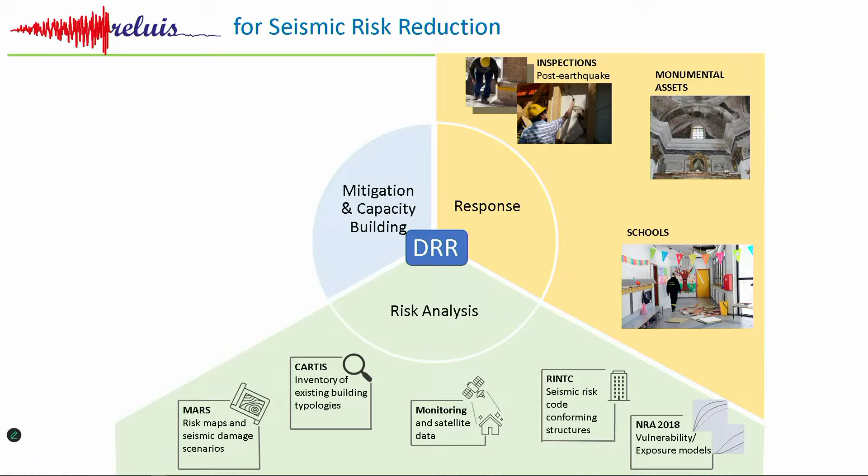Regarding seismic risk reduction, with ReLuis we work on disaster risk reduction across three components: response, especially after events; risk analysis, which I will mention later with several projects; and mitigation and capacity building, which involves a lot of activities devoted to raising awareness among people, providing design guidelines, and informing practitioners.

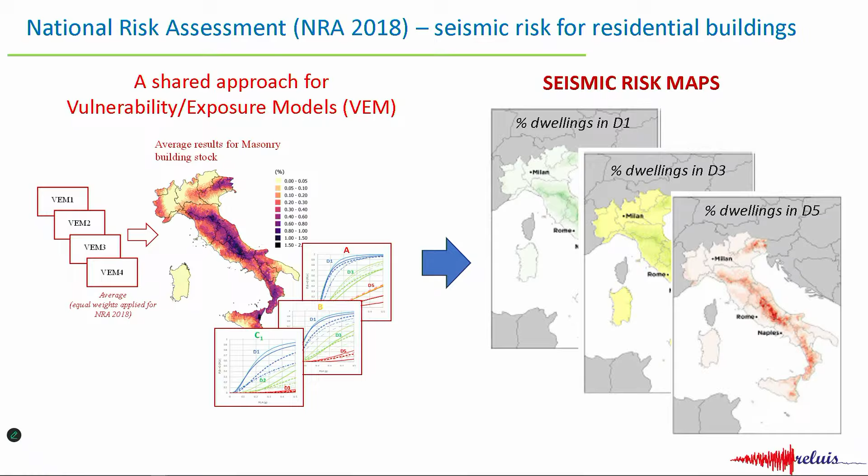So I think resilience is something that allows us to look at what we already do since many years, but putting all this together and having the perspective of resilience. So for sure the seismic risk maps are important, and in order to build them we need some ingredients.

That's why, for example, in Italy, I was very much involved, we performed a lot of work on the inventory. We made interview-based protocols and surveys about the typologies of buildings in different municipalities. As of now, we have covered more than 500 municipalities surveyed. This means we have an idea about the structural configuration of buildings, residential buildings, school buildings, and so forth.

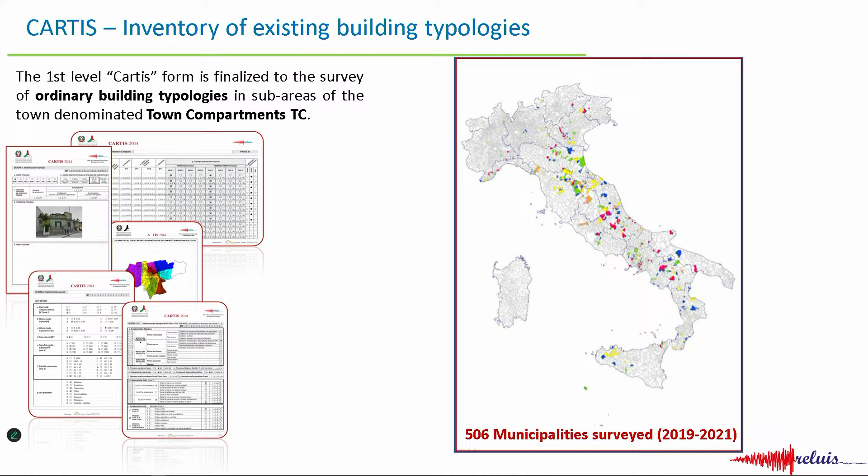We know this is very important because in this way we can really make a reliable assessment of risk, not only residential but also schools. I just need to go fast - you see more than 1,000 schools, so we also know very important information about school buildings.

On mitigation, I wanted to share with you interesting outcomes of a project about the definition of criteria and solutions for the design of integrated and sustainable interventions in Italy, but I think all over the world. We have a strong pressure to reduce the seismic risk, but at the same time to reduce the energy dispersion of buildings. So the effort we are performing is to push the government, but also the industrial world and practitioners, to look at this problem together.

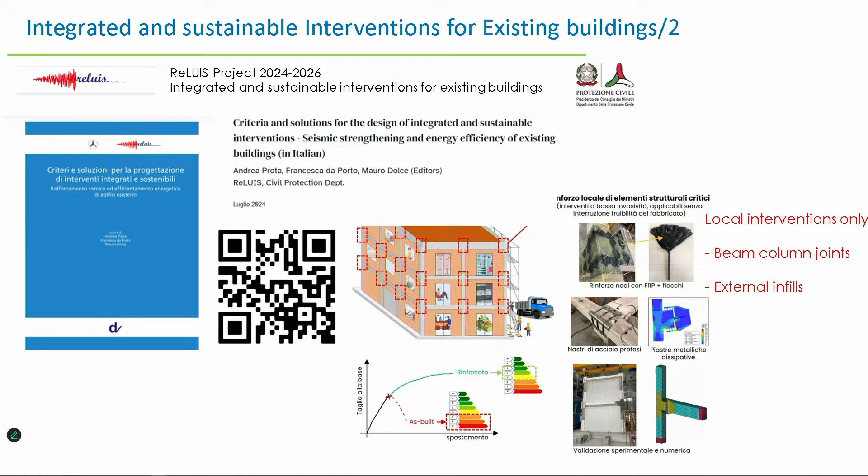So once you open up some works on a building, you take care of both the seismic part and the energy part. In the book, which you can access by the QR code, there are also examples which are important for us, and civil protection wants us to develop practical examples because all this should reach the practitioners, the engineers, the architects, the real world. That's why research becomes a support.

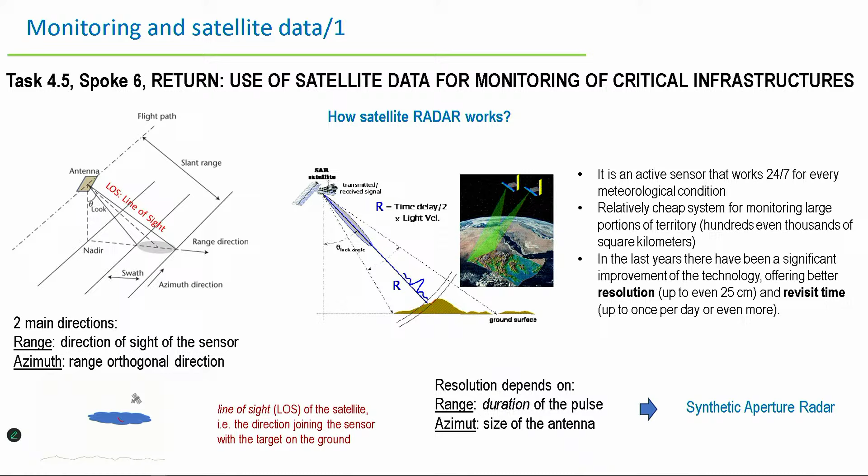I wanted to mention also some interesting activities we are doing on the use of satellite data for integrated monitoring of buildings and bridges. I can just go very fast on this, but this is a very important potential - again, to have a survey and to understand and assess the eventual displacement of bridges or buildings and establish priorities for interventions. So on this I'll go fast, and let's move on to the second part because time is short.

Resilience - we know this is a tool, I think, that can allow us to move from strategies to solutions and then to action. To answer, of course this is my point of view, I think we need to improve, on one side, the support of government, because science should be translated into policies in order to have real disaster risk governance. We need governments to assure financial support, and we need to involve and support the stakeholders, which are practitioners, entities like local authorities, but also civil society.

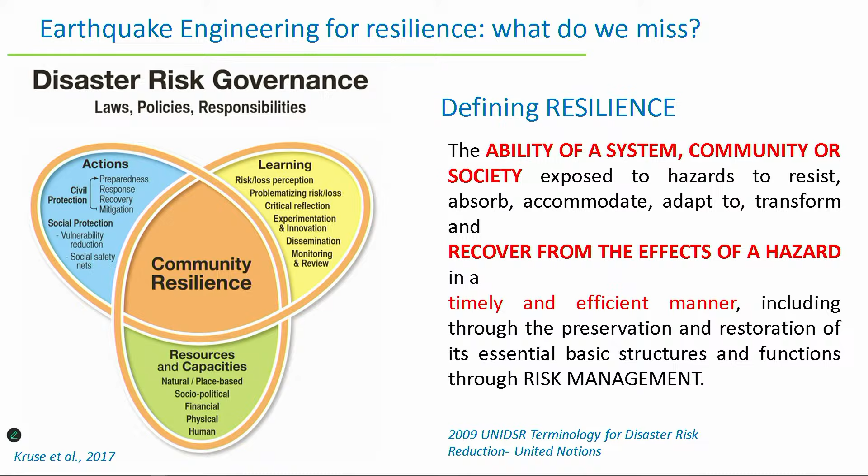In these slides you find one way of defining resilience - I'll just leave it like that. That's a definition in terms of terminology from the Disaster Risk Reduction framework of the United Nations. In any way, resilience aims at recovering from the effect of a hazard in a timely and efficient manner. There is also a proposal of definition from MCEER, the Multidisciplinary Center for Earthquake Engineering Research, and you see this circle that allows us to stress that resilience has different dimensions, and that we need to put together risk assessment and resilience assessment in a holistic approach, and understand how to measure resilience for different domains. This is a typical slide about resilience.

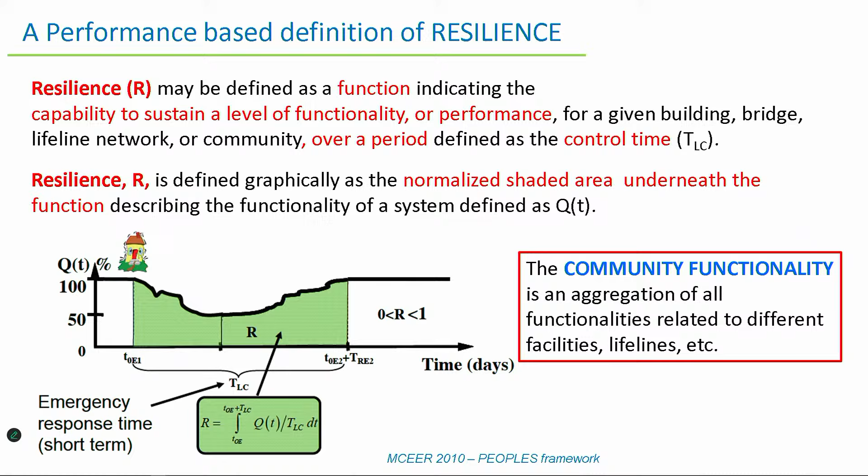I just left this for all of you in the room or online, but I'll say on this slide that we look at the community functionality, which is an aggregation of different functionalities related to facilities, lifelines, and other components of the built environment and the social components of our society.

Something we are doing, just to share with you in this flowchart, when we try to measure disaster resilience based on functionality: we have an initial functionality, then the functionality of the social system is affected by the hazard, which causes a drop after the shock, and then we need to evaluate the recovery pattern over time.

For example, we are working a lot on building portfolio recovery under earthquake, because we know there are defined impeding factors — factors that can cause delay, such as lack of money, lack of workers, lack of good policy. So the functionality curve over time can have a delay and then a trend which depends on this, and we are creating different scenarios around it.

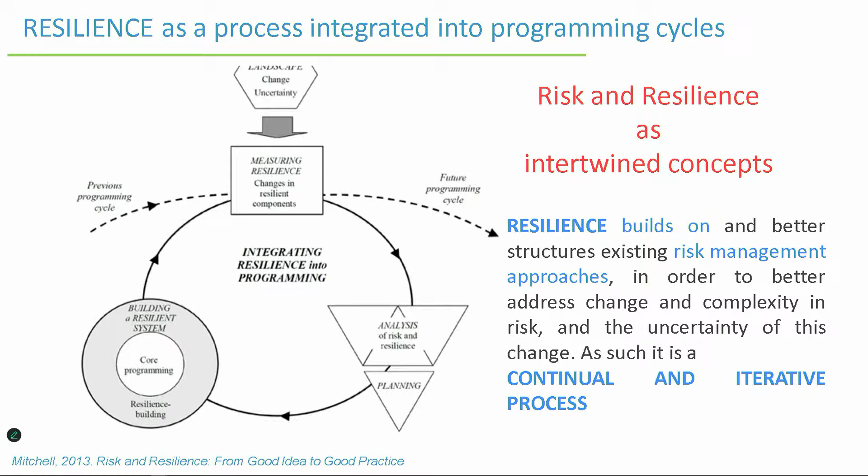Another concept, I hope we all agree on: risk and resilience should be looked at as a progressive update. We start by measuring resilience, but as we perform interventions or something outside changes, resilience changes, and the risk should be updated too. Just a few more minutes and I'm done.

To answer the last question, and to share a strong belief we have developed in Italy: for our science to become useful to the community and to citizens, we really need to link with people, with the community. So we need stakeholder involvement at different levels — local government authorities, policy makers, community groups, and citizens. We are working with colleagues in social science and economics to develop participative approaches for more effective planning and useful results.

I'll show some examples. I recall this interesting approach from UNDRR in 2017, where they proposed a disaster resilience scorecard for cities with 10 essentials — of course, very briefly. I'll develop one example, a way to address and apply the Sendai Framework for Disaster Risk Reduction. Let's pick the second one: identify, understand, and use current and future risk scenarios.

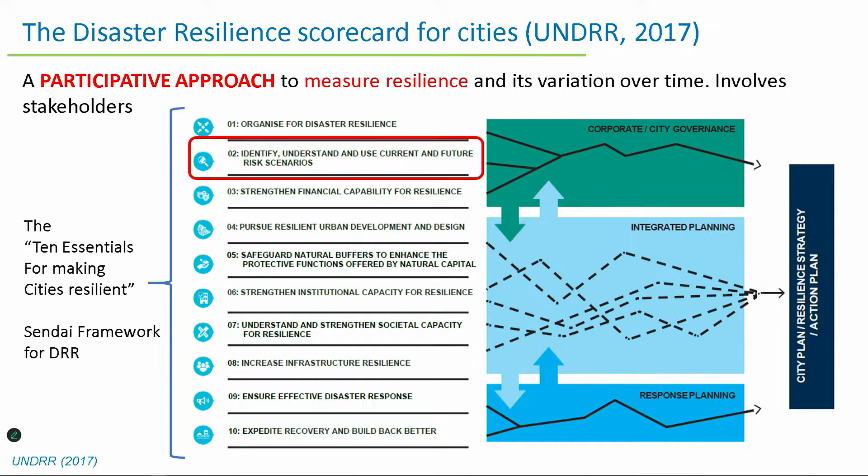In this approach there are two different levels. One is applicable in a short time, with questions where different stakeholders can provide a response on a range from 0 to 3 — for example, related to cascading impact. It's a way of interacting with stakeholders. Then there's another, more detailed level, taking 1 to 4 months, where the assessment is more careful and the outcome is more detailed.

Just to give you an example of what's going on in the world with this approach — in Italy we are developing two storylines which are very important. These are photographs taken at different universities. You see people sitting around the table with a collaborative approach.

We also invite stakeholders and representatives of associations to take this approach, starting with a brief story — you put a case on the table and categorize the impact, looking at population, public services, critical infrastructure, and natural environment. Then you look at the interdependence between these and the cascading impacts — you see all those post-its we put on the screen.

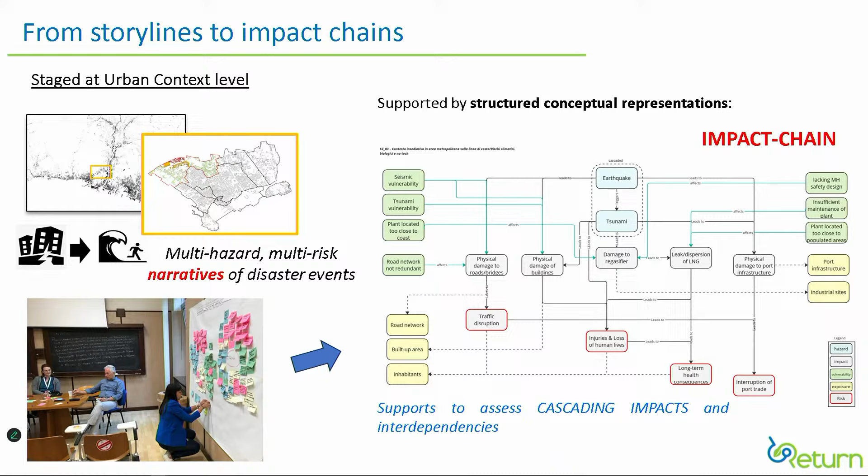I think I'm at 15 minutes, my last slide. Professor Ayala asked us very hard questions — of course I just gave my perspective, but I think earthquake engineering should improve dialogue with multiple stakeholders, and it's important to push toward more resilient communities, because this is a pathway to more inclusive community resilience.

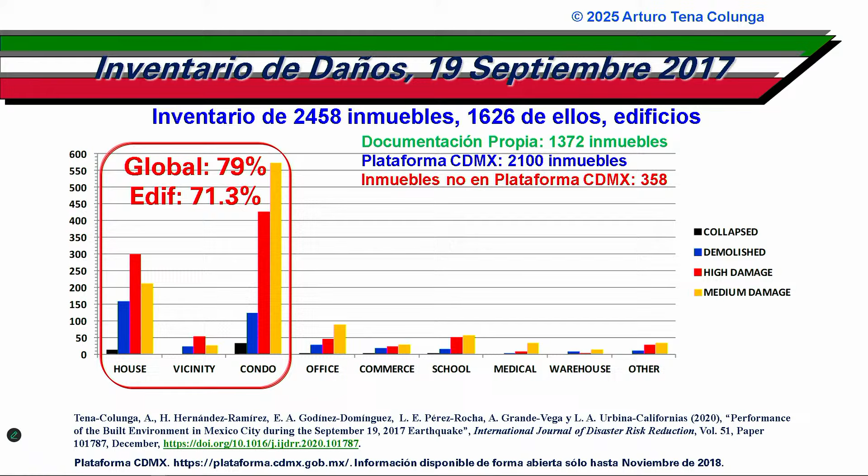We have close to 2,500 buildings that were seriously damaged in several parts. I didn't like the quantity, taking into account the size of the earthquake and whatever. I didn't like that most of the damaged structures were for housing, according to the statistics that we had.

And if we look at the codes, we have 18% done with collapse prevention, modern codes that should behave better given the demands in the places where they were, that is in the western part of the Lake Texcoco, where the ground motions weren't that intense compared to the design spectra. So basically, if we look at the 1976 code, okay, we could say that was surpassed by far. But if you look at 1987, 1995, and 2004, they should have been covered in that region.

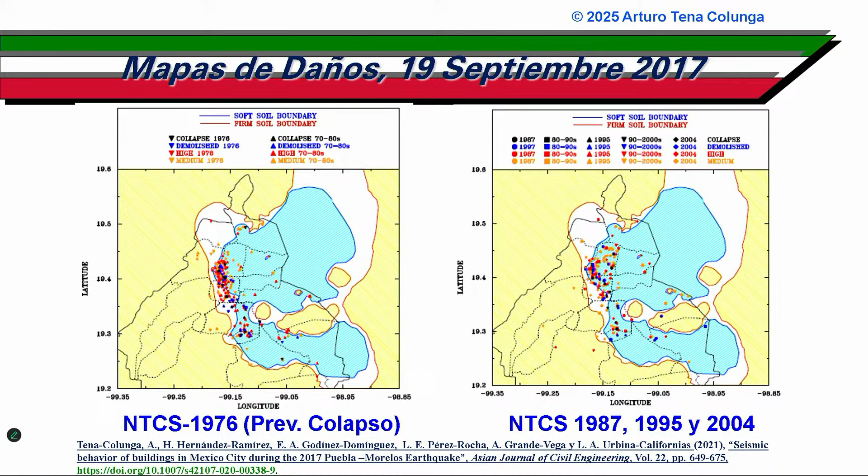Then an eternal problem with the structural irregularities. 90% of the damage was on structures with at least one structural irregularity. And it's something that we have to address through research, not through inventions like some are doing. Some people don't think we have to have a special way to design structures with low redundancy in one direction. They are very vulnerable, as we can see in the statistics.

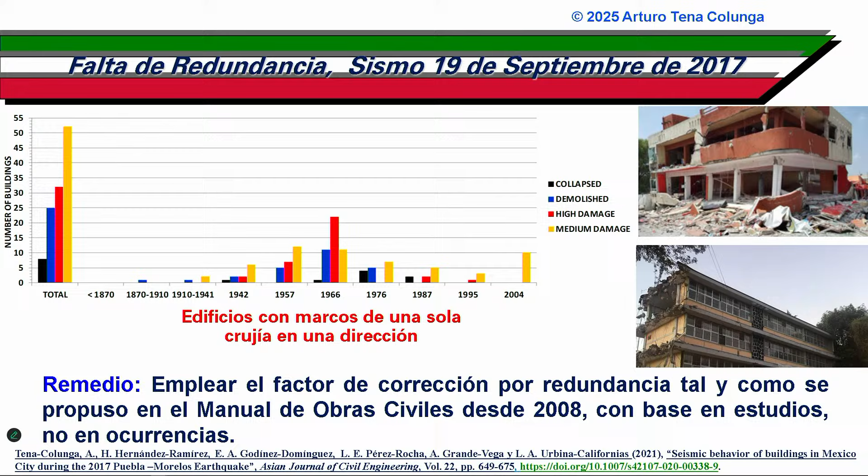We didn't decide to build a city when they made this historical decision, but we have this problem with the subsoils, and it's something we have to take into account, including when we are trying to promote seismic control technologies like base isolation. That is not a place where we should use base isolation, and some people are saying that they are resilient just because they put it there.

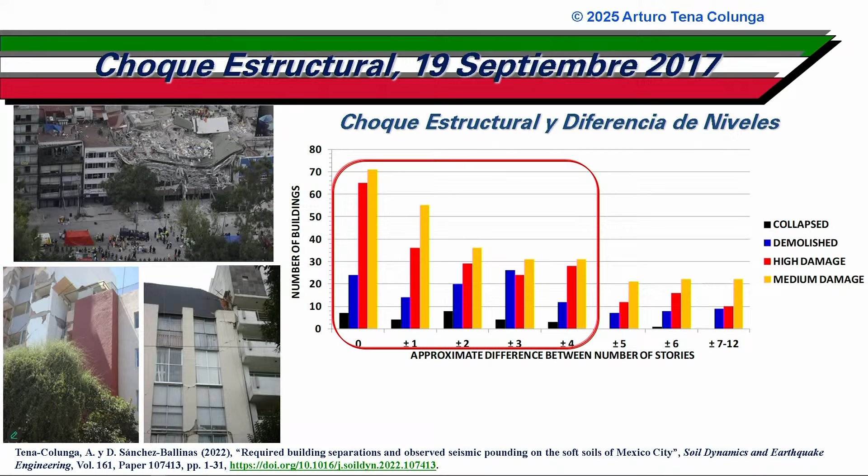And a perennial problem, structural pounding, that is magnified in these subsoils. We have to do something to provide better tools to the engineers to get the gaps right. This is the statistics of structural pounding, favored by non-synchronicity between the natural periods of the structures. As you can see, most of them were between 4-story buildings where they get this problem. We are trying to say that in the subsoils, we have to have at least a gap of 15 centimeters if we want to avoid the pounding being too strong, or have in the code an equation where the coupling, the synchronization, is taken into account to get a more realistic gap.

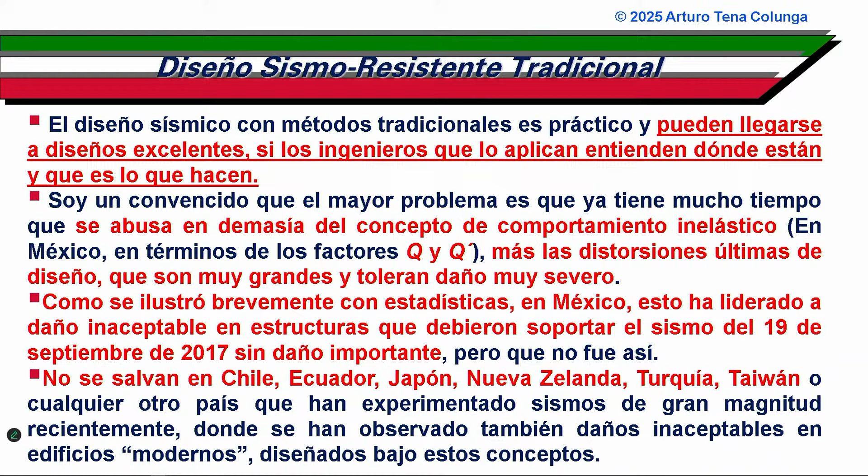And this is not only in Mexico, it's in any major earthquake. You see it in New Zealand, you see it in Taiwan. Soon we will see it in the States too. So basically, in Japan, there's also a problem with that. And basically, I don't think the problem is the methods. What happens when you reduce with ductility the design spectrum and you take the hysteretic behavior into account?

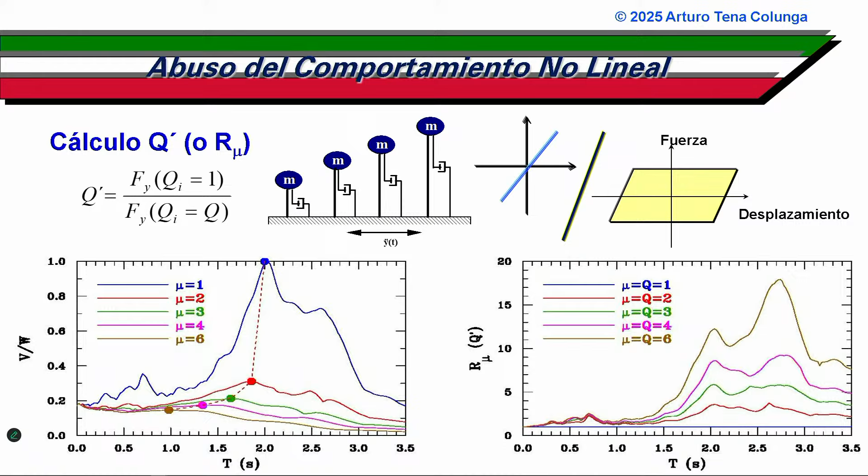In soft soils you have very large reduction factors, and that is very attractive for people. But if you reduce the strength, you're shifting the period of a weak structure, causing it to travel further and go into resonance. The problem is many people only understand elastic dynamics and resonance, that's the graph on the left. But in the nonlinear part, if you reduce with large forces, the resonance response shifts. So some people say, 'I have an elastic period of 1.3 seconds and I'm safe because my site period is 2.' No, it is not, because with a large reduction you get an amplified response there.

What we have to promote for resilience, in my opinion, is making engineers understand structural dynamics, nonlinear structural dynamics, so they don't design into what I call the rocky zone, the yellow one, where you get a lot of uncontrolled nonlinear deformation. We need to give engineers the tools to shift toward the zones of the spectra with reduced response, what I call the Mayweather zone, as an analogy to boxing.

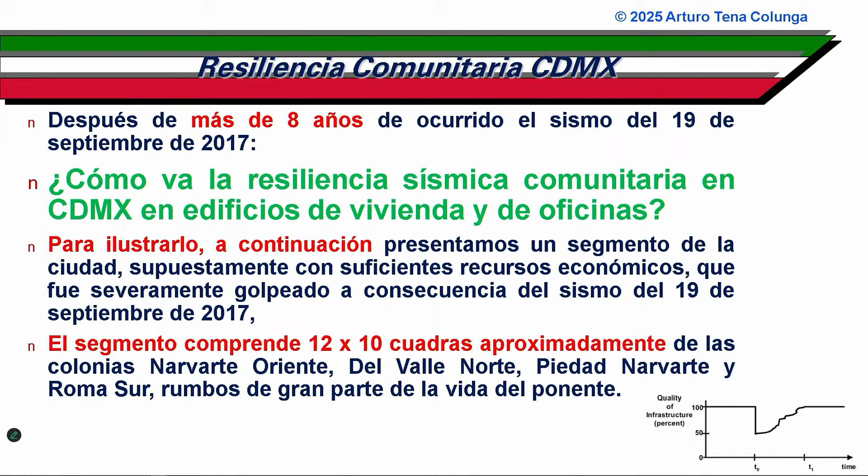So we're talking about these frameworks of resilience, which are of course complex, and we have to do these things. The problem is that sometimes this is based on guesses, not actual data. We have statistics of earthquakes, and everybody is a paparazzi of what's happening in a recent earthquake, but no one follows up.

Well, I follow up. This inventory of structures I've been following, it's like I could call it soccer - this is my VAR video system, referee look. I take a place I know very well, where more buildings were damaged.

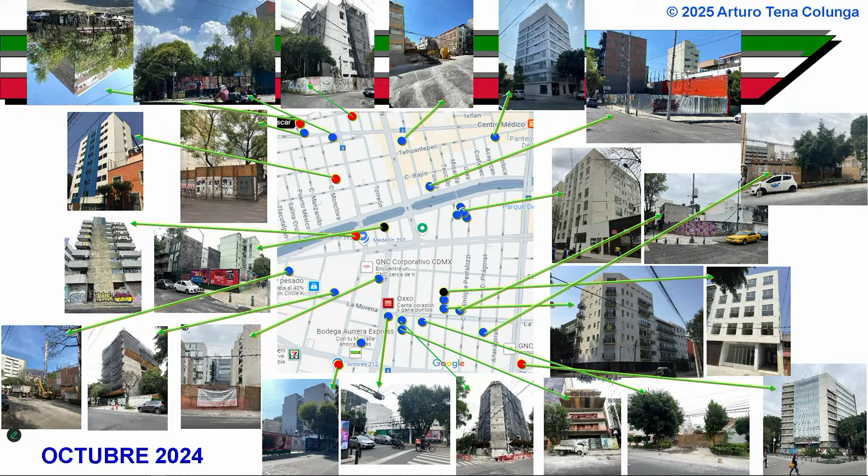This is an inventory of 28 buildings that either had a partial collapse, collapsed, were demolished, or were retrofitted. That's how they looked in October 2024. That's how the recovery went. Some of them are still vacant lots, some of them after 7 years fit into this framework of just a very small part of resilience. So this is not really good resilience - the recovery of this sector is like 40% seven years after, on housing.

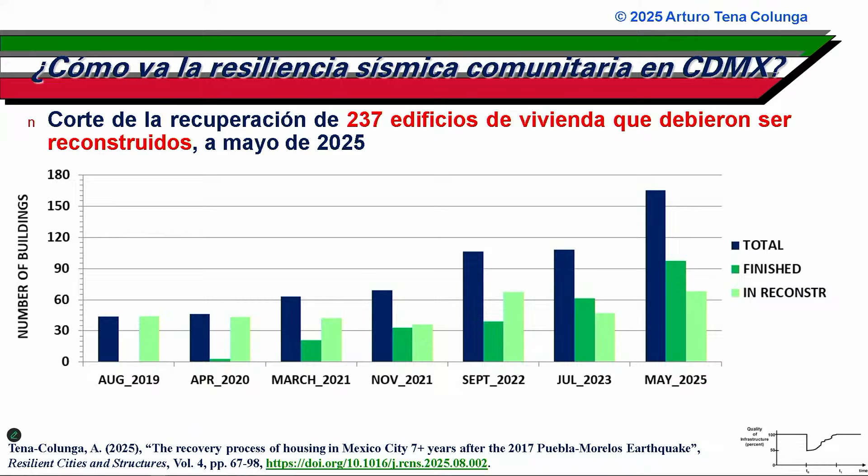We've been following up on this - for example, this is an inventory of 237 housing buildings that were demolished or collapsed. As you see in blue, those are the ones where we have not done anything. The ones reconstructed with funds or in administrative processes are those that collapsed and were demolished almost immediately - but we have not recovered all of them. If we look at how this has been recovered over time, it doesn't seem like we're doing that great - from 237, we've just finished a little more than 90.

If we want to do resilience and use these integrals for cost-effectiveness, we have to use realistic downtimes and recovery processes, because a building that collapsed, the recovery is not like starting a new building with standard labor timelines.

Still, there were some kind of social problems, and still we don't have such fancy times that we recover. Okay, these are...

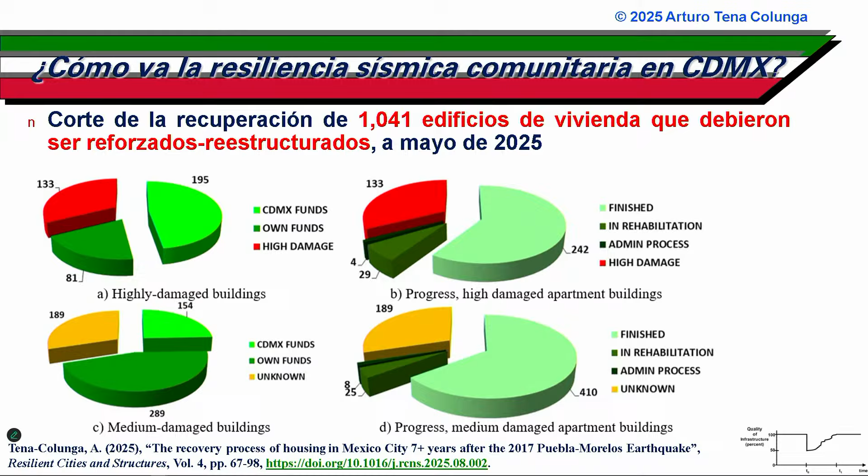Okay, so basically what we have to do is improve resilience, and the way we have to improve resilience is that new buildings, the codes have to promote buildings that are resilient. Newer buildings, otherwise we were going to have bad inventory. We have to promote that the buildings that are retrofitted are resilient too.

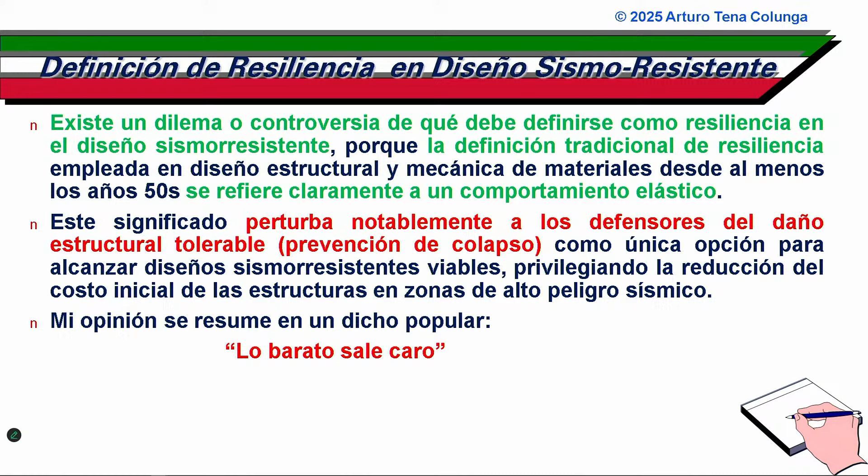Okay, so basically we don't need fancy methods. We have one of the most resilient buildings in the world, that is Torre Latinoamericana. The people that were involved there understand dynamics, understand structural engineering, understand detailing, understand that a good structure doesn't have to be cheap. That means it doesn't have to cost more. This is a favorite from the press.

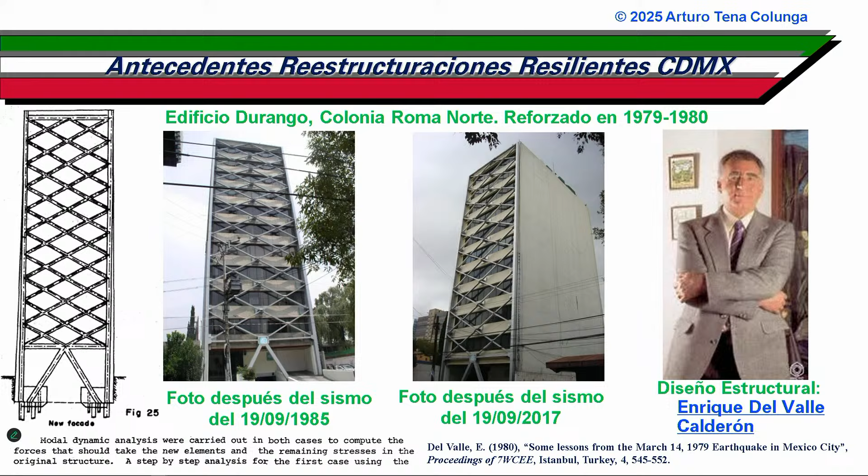We have resilient retrofits, pioneering exoskeleton retrofits that, after it was retrofitted in 1979, nothing happened in 1985, nothing happened in 2017. So basically we can promote in the codes resilient-oriented design with the tools engineers understand.

For that, what we have to change is the mindset. We are going to detail the structure so they will have a large ultimate deformation capacity, but we are not going to take all for design.

We are just going to take this green zone where we have an occupancy or immediate occupancy status, and in the Mexican code, we have to determine how much of the ductility we are going to reduce and how much of the overstrength we are going to reduce, so we will have this goal of having occupancy and immediate occupancy.

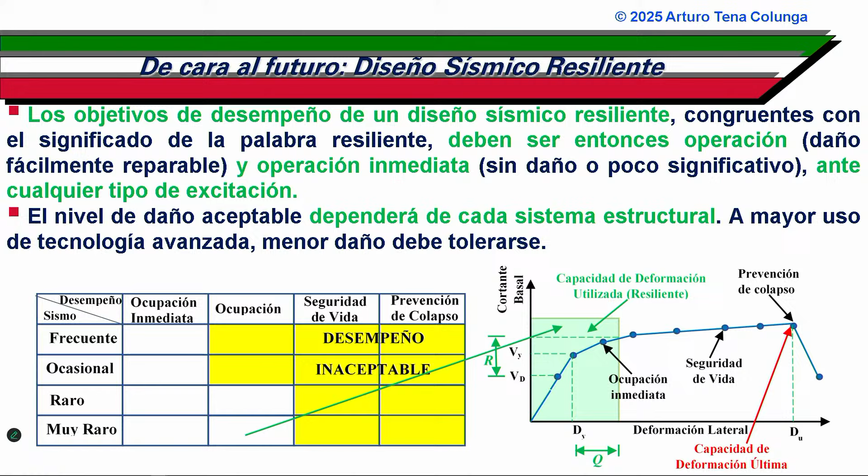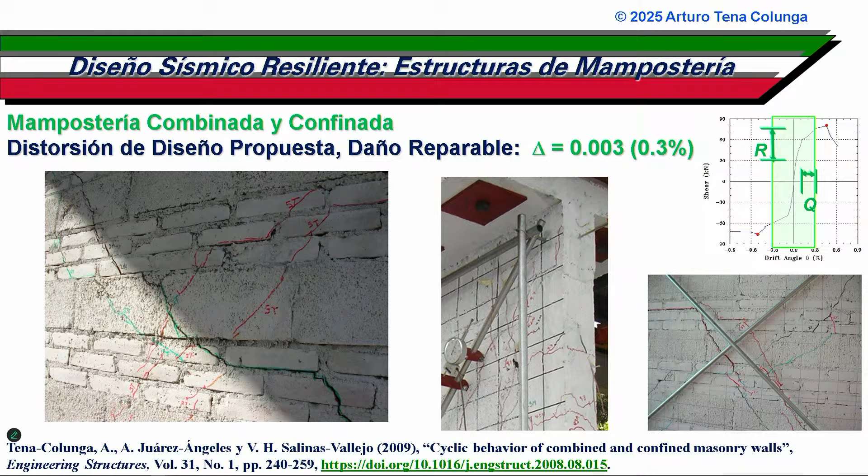Of course, that depends on the system, how much damage you will tolerate. For example, we did this work on masonry, and for confined masonry, of course, this damage is not good, but you can repair that kind of building and still have some ductility and overstrength that can help you achieve that goal.

Of course, if you use passive energy dissipation, base isolation, you can do much better, but your goal there is that the structural system for gravitational loading has to remain elastic, and you take all the nonlinear part from the energy dissipation. Then you can still compute the ductility and the overstrength you have for such a system, where the energy dissipators are going to be replaced over time.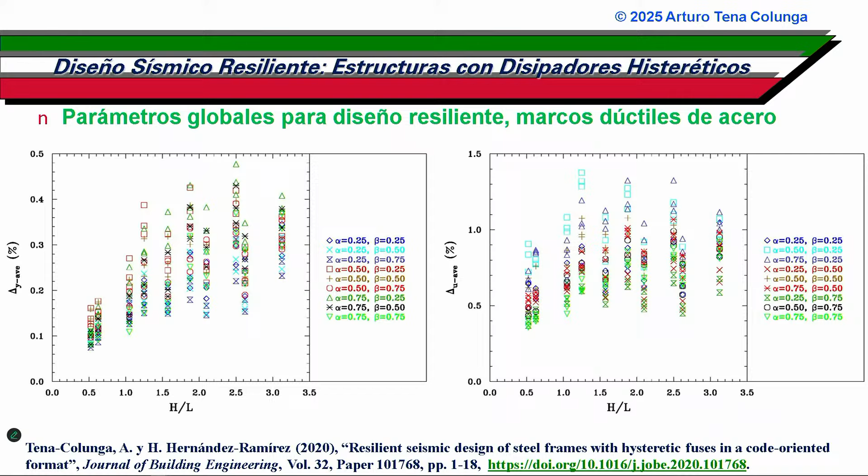I have been working on this. It's not something that cannot be done. This is about 217 steel buildings where we get the parameters for the Mexican codes and the American codes, for the deformation capacity, for overstrength, how to estimate the natural period, which will be the yielding displacement and the ultimate displacement, depending on the parameters. And you can promote methodologies based on the codes.

For example, this is for reinforced concrete frames, intermediate moment frames with energy dissipators, including soil-structure interaction, where we can get a design using the normal procedures, modal analysis, whatever. You just can get it.

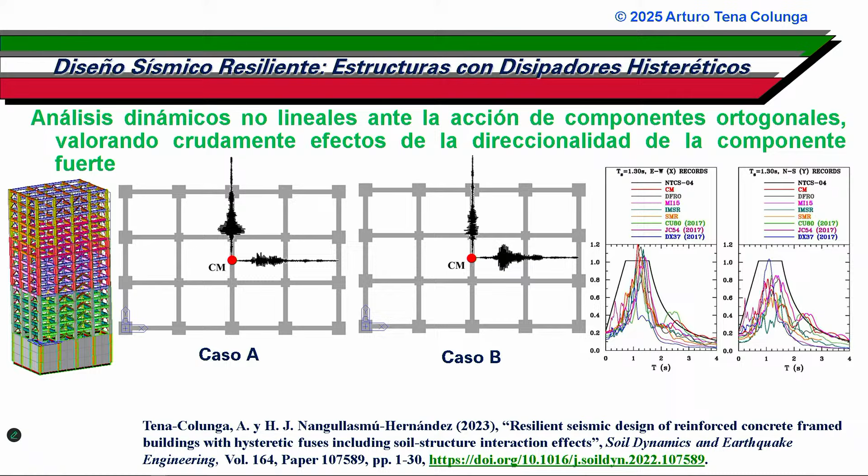You can submit it to a series of records, bidirectional records, where you match the design spectra, or like Mario said, even more. We did it even more for the steel, but I don't have the time. And then you can have your resilience performance.

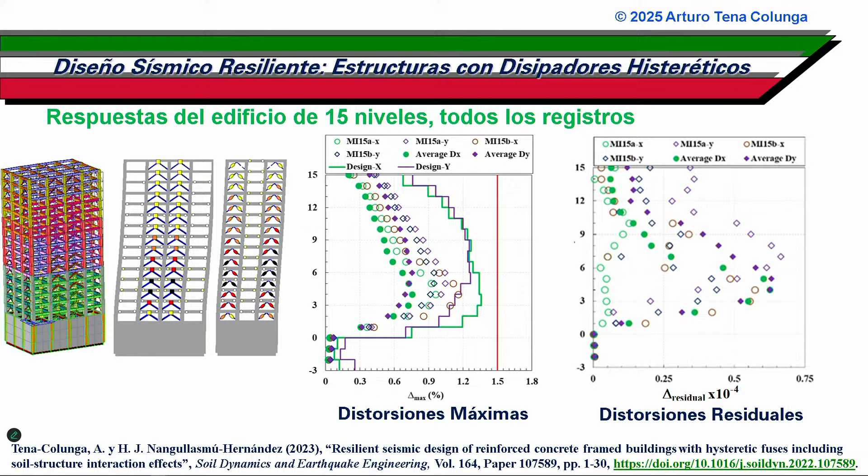These are the demands, the mean demands, and the peak demands, and these are the residual deformations. You can do it. So basically, on these kinds of studies that we have been working on with some of my students...

We have proposals for the codes, for the Mexican codes, the European code, and the ASCE 7, for what will be the global design parameter using traditional procedures, and the height limits, with the heights of the buildings that we just studied, which were up to 25 stories.

This is for the moment frames, reinforced concrete, and the other ones are for composite moment frames, and I have it for the steel frames too. So we need more studies like that for other conventional systems, because not all people like to use energy dissipation. Some people prefer to use bracing. Some people prefer to use moment frames alone. We can do it.

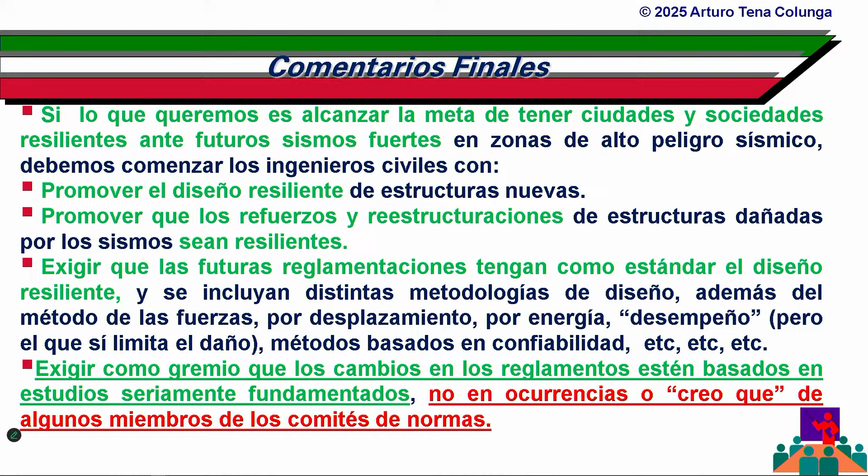Researchers and their teams should do this, because otherwise we will keep having issues in the codes. I think that if you do this, it will be a better design. They don't have any study, and they put it in the code, and they force people to use something that is not a study, and the guys designing have to sign responsible for that. I don't think that is good anymore, because now we have tools, not perfect. Of course, we will never have perfect tools, but we have tools to propose better things based on studies. In the Romantic times, intuition was very important, because we didn't have that many tools and that many hands. Well, that will be my vision.

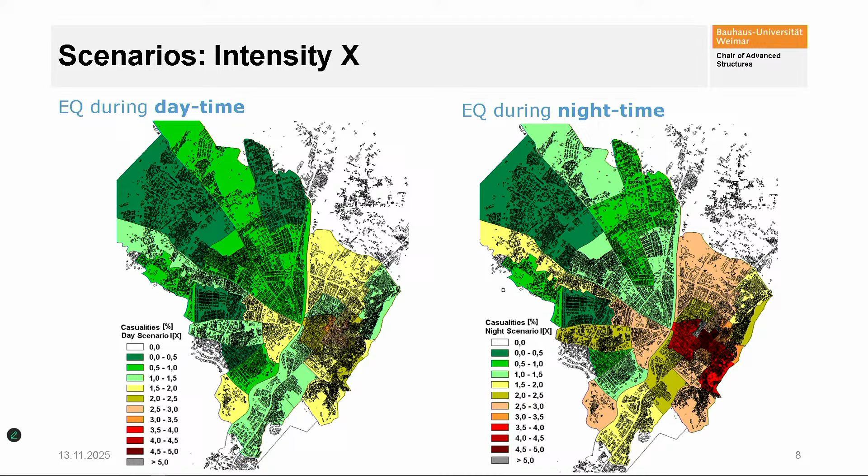Here I'd underline what all my previous speakers talked about: we have to engage the community, bring them into it, to get better resilience. We also have tools for distinguishing daytime versus nighttime, and what the probable casualties are. This is all what has driven us to develop these very nice tools in hand, talking about what constitutes collapse, or how to simulate things. We've already addressed in some slides that we want to shift to discussing the probable damage and the limit states.

I think I have this in the last slide as well, because that's also something about communication. I think communication will definitely be one of our next issues—how to communicate what will be the acceptable probable damage in our design procedures.

And this needs to be addressed. That's also the key challenge for us. If we are at universities, we have to train the next generation of engineers in this direction, and this needs to be openly communicated to society. But this leads also to some problems which we still face.

Here I have a plot from a blind test, which are quite often done. Probably Mosalam can report about that as well. I think that's a very great thing to do more often, because it shows us what our limits are so far. We are very good at predicting the response in the linear range, but if it goes really into the nonlinear range and damage, then we might face quite often some problems.

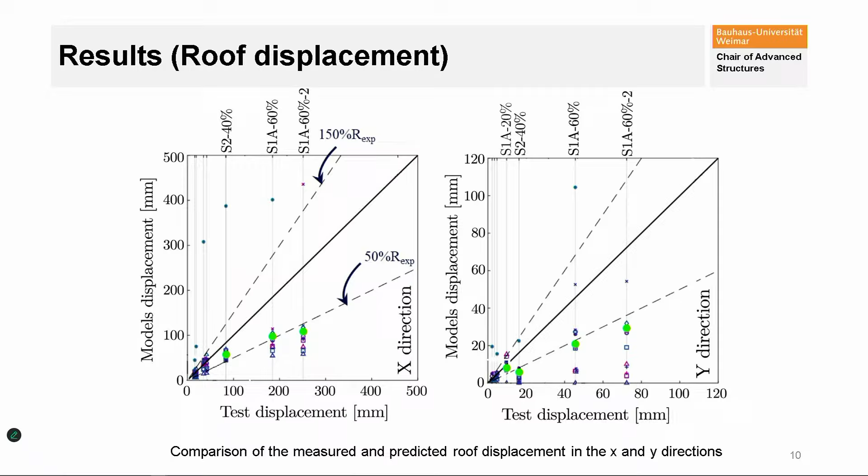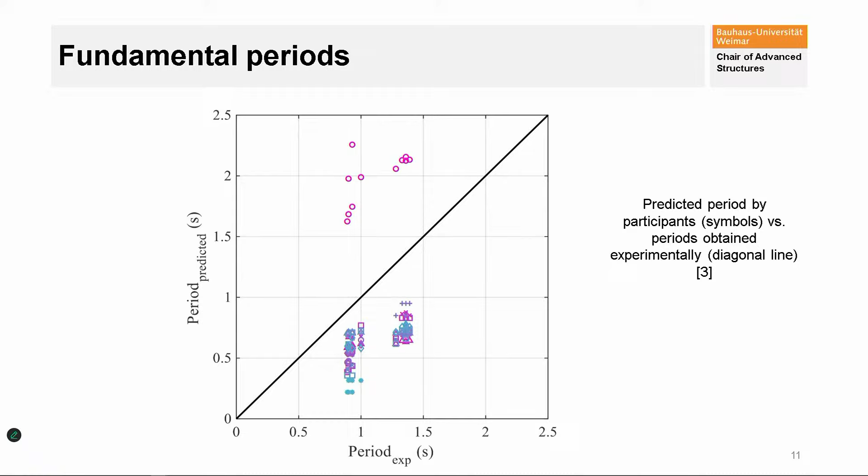Here's another figure about the fundamental period, where we already face, with rather simple parameters, a situation where we are still not very certain. We have to improve a lot there, and I see that as one of the challenges and directions where we still have to go.

But what we hadn't under good control, particularly in that case, from my perspective, was the non-structural elements. That means we will definitely see a shift in the limit states and the acceptance of damages, which will drive our future direction in earthquake engineering, and particularly in the communication of what might happen, to get to a resilient society and community, as Dr. Ayala wants to discuss.

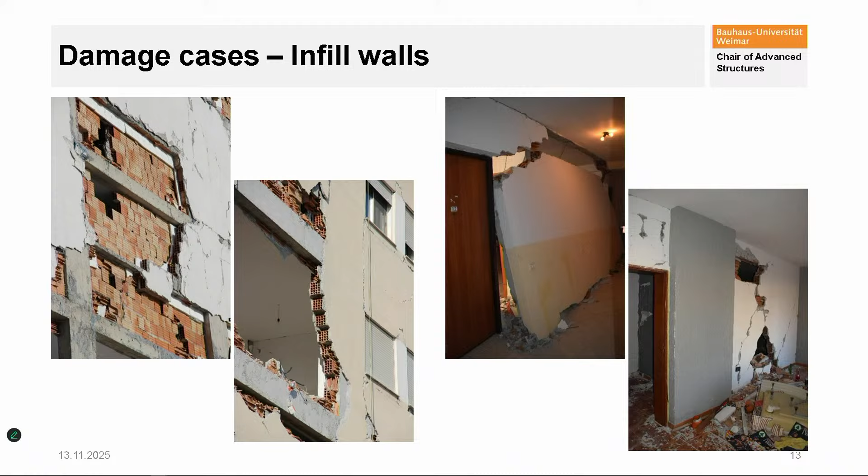On the other hand, we have these nice tools, which were also mentioned by my previous speakers. We have everything in hand. We need now students who can deal with that, so we have to be good teachers in this direction, to train students to understand this.

This is my real opinion: it doesn't help to just use ChatGPT and so on. It can be a tool, but we really need to understand the physics and the methods behind it. And this applies not only to young engineers, but also to practitioners, because only then do we get to a resilient community.

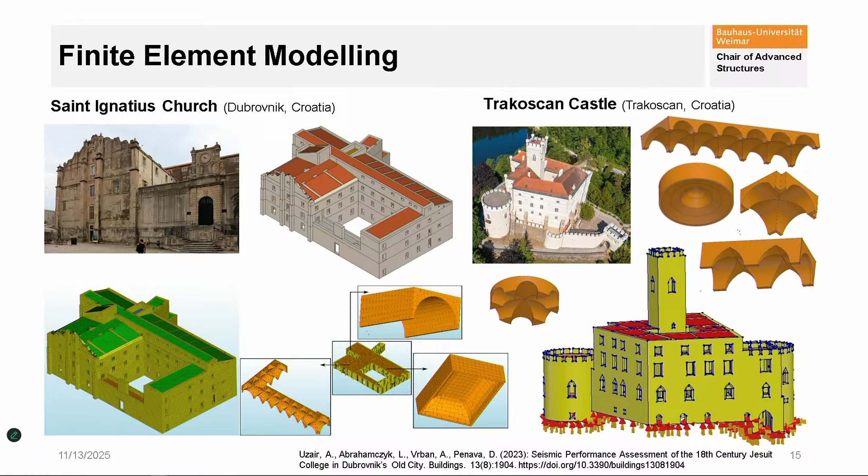What we did in the past, we tried to do this also for historical structures. We have nowadays these tools, whereas there are a lot of uncertainties in it, but I think the capabilities are there. We just need to do it and train for the further directions.

This brings me already to the challenges and opportunities. I tried to keep it very brief. The challenges I see, and I hope I've addressed already a bit, are that we still need more validation. We need to validate our models, and we have to further improve our models, and this is where research really has to contribute.

Thanks to all the facilities we have, the shake table tests, and nowadays the much more computational power, I see this as a challenge, but also a challenge that can be reached rather fast. A challenge will definitely be the definition and acceptance of limit states, because that's nothing we can do alone as structural engineers. This is a society issue, and there we need communication. For us as engineers who are sometimes not that communicative, I think that's definitely also a challenge for us, how to communicate this and get linked.

But that's actually very appreciated, the discussions previously. We need these community models where we get introduced by all disciplines into the discussion. On the other hand, I see also a challenge to develop simplified models and simplified methods, because what I have shown, we have huge numerical models, we have the computational power, but on the other hand, simplified methods, rules of thumb, give us the certainty that we go in the right direction, and we have to make things more simple, because if we can describe it in a simple way, then we can better communicate it.

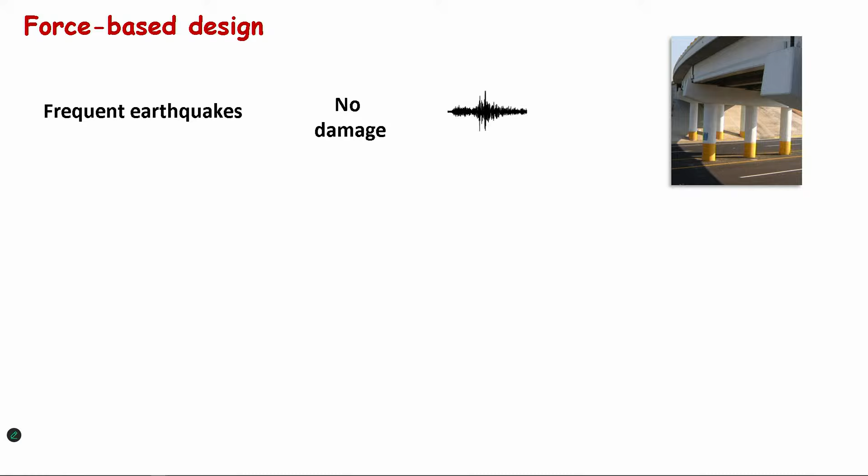So, but what we were expecting was the force-based design way. Well, when frequent earthquakes occur, no damage. We design for earthquakes, reparable damage in a very simple way, and with infrequent earthquakes, collapse prevention. But what do we see every day after we have a strong earthquake in the world?

Even the main goal of this methodology is to protect human lives, as many speakers before me have mentioned, by preventing the collapse of structures. It's also considered in what is called the equal displacement rule. That is one very simple way to get the displacement demand of the structures, but unfortunately it's also one of the main weaknesses.

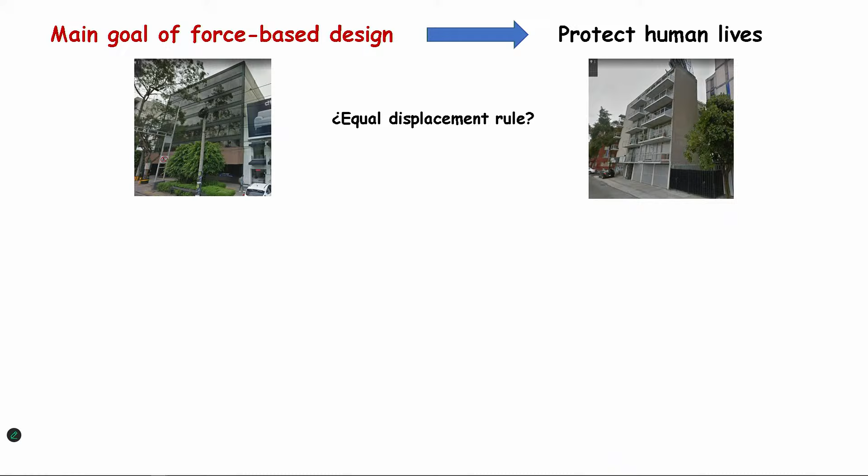So when we see pictures like this after an earthquake, we immediately think something is not working well with this philosophy, among other things. If we look at just one statistic, this methodology is supposed to protect against human losses. When we see a statistic like this one from the USGS, considering human losses of different strong earthquakes, if we just look at the earthquakes of this century in this graph, we find really, really large human losses, and obviously economic losses as well.

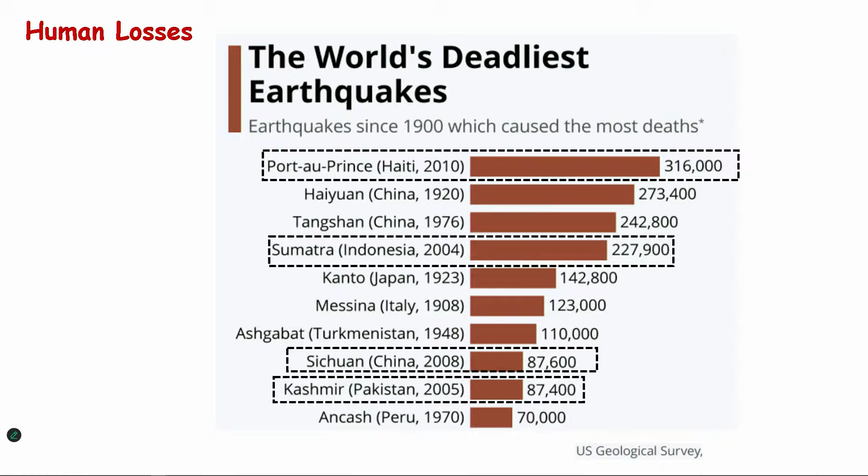But we see that even though it is multifactorial, the reason this happens is something we cannot accept today. So the force-based design, particularly, I'm going to show what is happening in some parts of the world after a disaster occurs because of an earthquake, and it's no exception in Mexico.

In Mexico City, for example, in the soft soil zone, we have used the seismic coefficient, which is the highest amplitude of the response spectrum. These are the values for different codes in Mexico City since 1957. So it changed in '66 to values similar to this, in '76, in 2004, and in 2023 we have values close to this value.

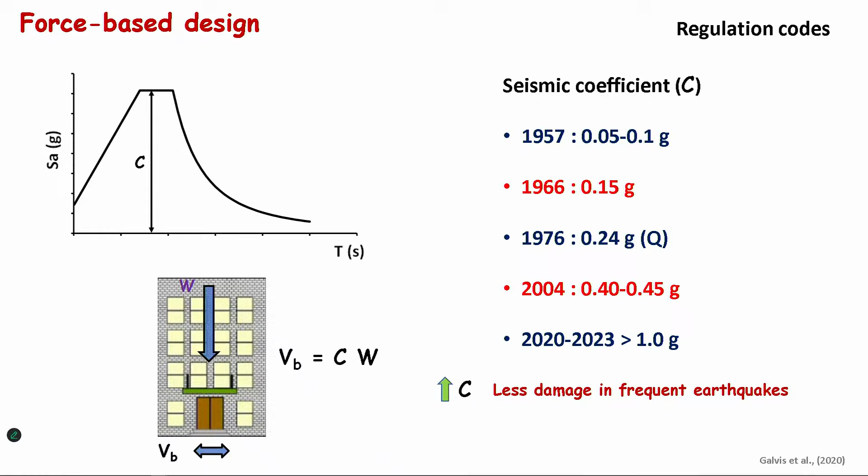But we have to accept that when we are just increasing this, obviously there are not the only changes in the regulation code. There are other changes that have shown the result could be better when the earthquake occurs. But we have to accept that in general, just this methodology of force-based design, just increasing the seismic coefficient, obviously produces less damage in frequent earthquakes, but it's not necessarily the same for design on infrequent earthquakes.

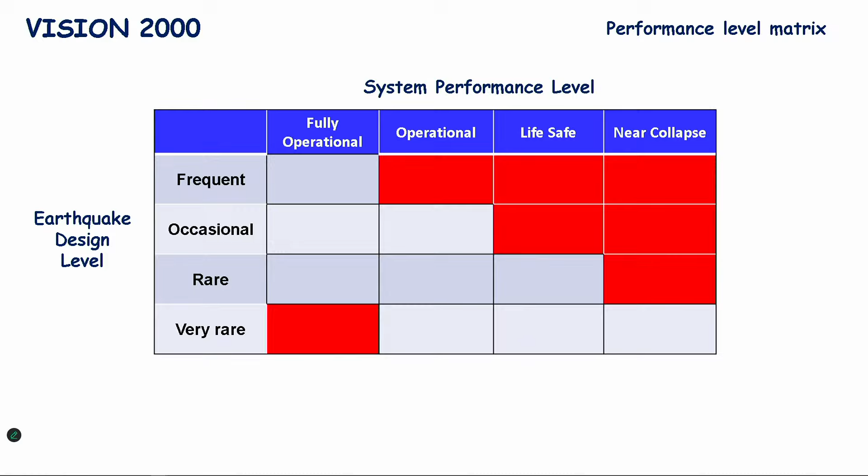So the document that I mentioned before, this is the matrix that for the first time establishes a relationship between the performance level and earthquake design levels. In the diagonal, we have the main objectives, the basic objective, for example for housing or for short span bridges. When we have a frequent earthquake, we're supposed to have fully operational performance, and with a very rare earthquake, we would be waiting for a behavior performance level near collapse.

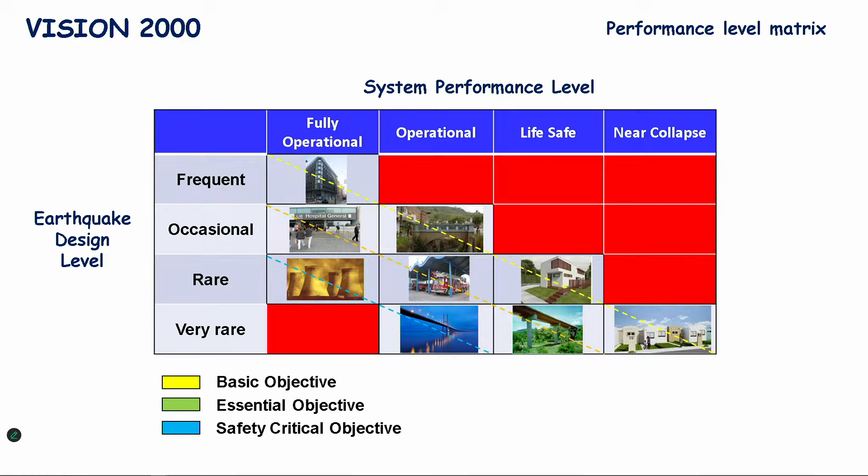So in the next diagonal, that includes hospitals, for example, or bridges in an urban area like Mexico City, in this essential objective, we just accept for the very rare design level, life safety. Or even for the more important structures for society, we will only accept operational performance after a very rare earthquake. So it goes naturally to performance-based design, where preventing collapse is not the only main objective.

So immediately after this, we started working on more papers published with loss models, where we try to evaluate what is called the engineering demand parameters, and with this information, fragility curves, and finally evaluate the expected losses of these events. I have to mention that in the last 25 years, we have published several papers related to these topics, but I also have to say there were important contributions from Professor Luis Esteva beginning in the late 60s, when he was talking about economical aspects, the economic failures after earthquakes, and subsequent studies from Professor Esteva. He was working on the life cycle of a structure, now very closely related to resilience.

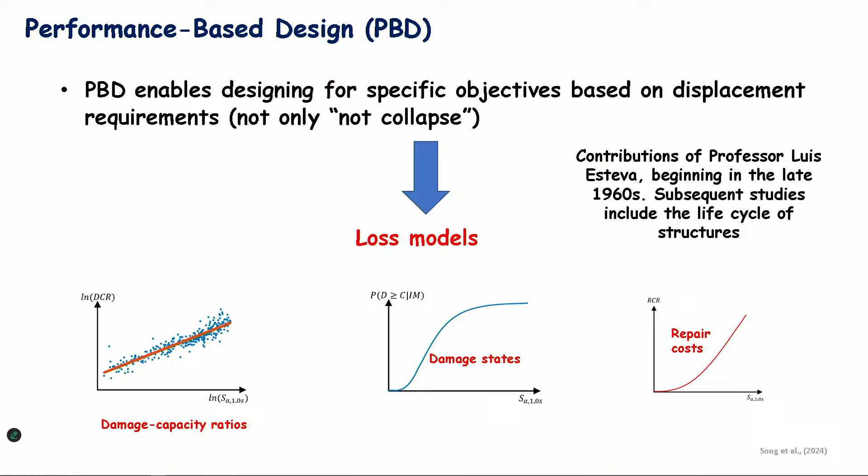Just to remember, seismic risk is a consequence of having the opportunity of evaluating the economic losses. So we have three systems whose intersection can define the seismic risk: the seismic hazard, seismic vulnerability, and exposure. The seismic vulnerability, by the way, we have to accept that unfortunately, in the world we live in, the lower income population suffers excessively greater losses. It's a fact, and it also happens that higher income countries, even living in sites with risk, have greater capacity to mitigate and recover from the effects of earthquakes.

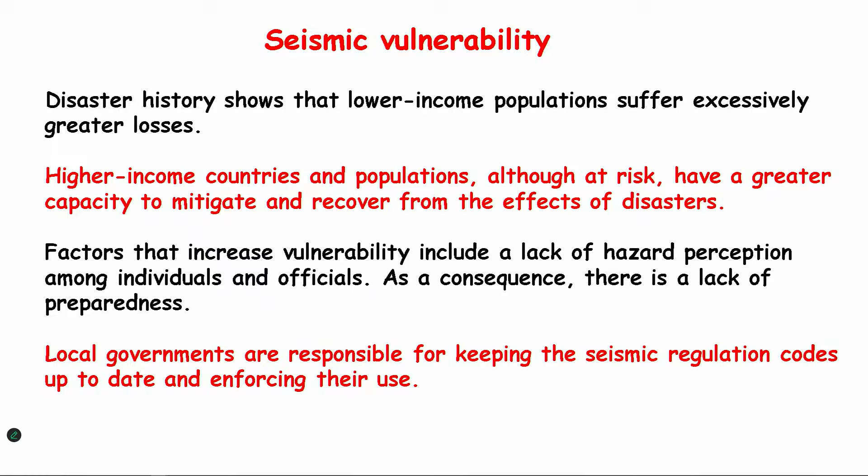So factors that increase vulnerability include, and this is important in countries like Mexico, particularly cities outside of Mexico City, the lack of hazard perception among individuals and officials in governments produces a lack of preparedness. So local governments that should be responsible for keeping the seismic regulation codes up to date and enforcing their use are not always working well with this issue.

Earthquake effects normally cause casualties and structural damages, and most published papers focus on human and economic losses. Less attention has been paid to community impacts like services, sanitation, healthcare, education, and public transportation. The number of papers working on this area is improving, but there's still less attention paid to non-structural damages. So naturally we arrive at one parameter quite relevant for evaluating resilience: the loss of functionality.

Damage to infrastructure can give rise to other hazards, particularly in certain types of infrastructure, like hazardous materials - for example, the release of these materials can also have multi-scale impacts that we usually don't consider, and we've started working on several papers in the world about this topic.

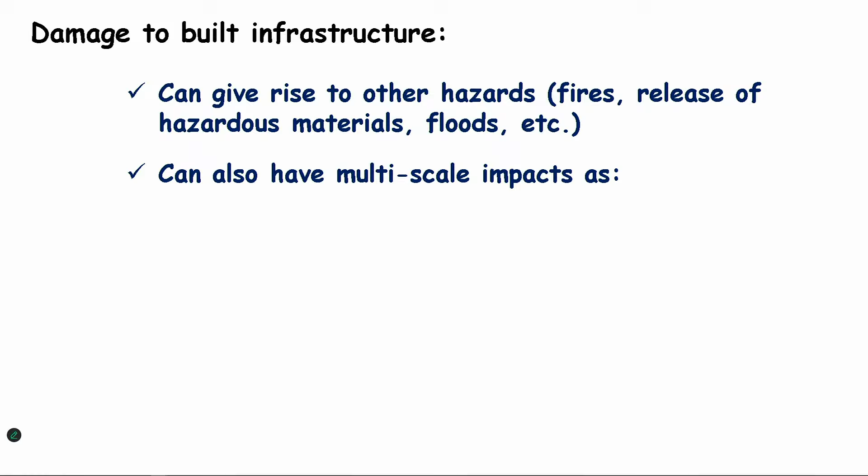We have to consider that this multiple scale impact includes physical and emotional trauma for people, displacement of families, disruption of community services, and loss of functionality of bridges, buildings, and lifeline systems. Considering all of this, a multidisciplinary approach should be considered - social, economic, and technical aspects - if we want to evaluate resilience.

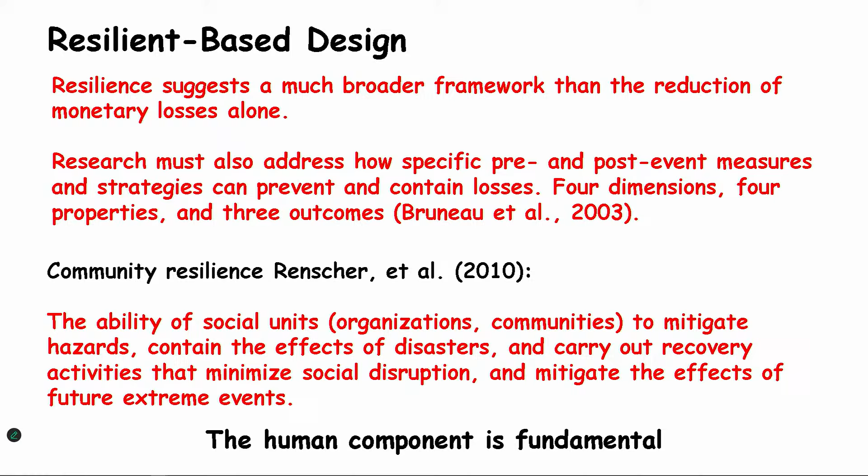I'll go through this quickly, but I think all the previous speakers were talking about this. Just remember that community resilience includes, obviously as a very important part, the social unit. We see definitions like these two shown here - we have to accept that resilience is completely related to the human component. We cannot separate these parameters.

In general terms, we all now recognize that all the impacts of earthquakes are related with functionality, the downtime that was previously mentioned in a prior presentation - all of them have a direct effect on people, and all of them are totally connected.

Here's an example of what we mentioned before about cascade effects - related to the earthquake in New Zealand in 2011. In the city's central business district, 90% of close to 2,000 buildings were in unsafe condition. So the city decided to impose a cordon around this area. What we see as a cascade effect, just talking about buildings in this case, is that this cordon involved all the parts the city considered unsafe, but inside this cordon there were many buildings that only had minor damages - the cordon applied to all of them.

So we also have loss of functionality when accessibility is compromised, like in this case in New Zealand.

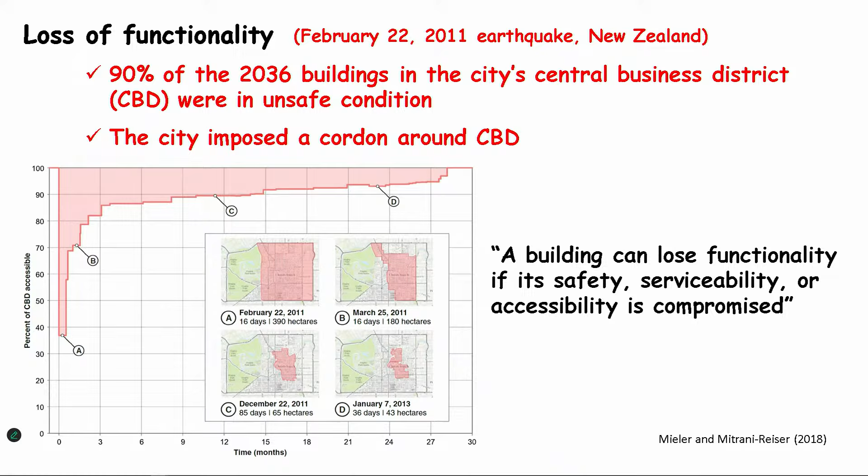Something I want to point out, particularly for bridge resilience - even though we're talking more about buildings, bridges have their particular aspects that we have to consider as multi-hazard analysis. Every transportation system should include bridges, and we have to conduct multi-hazard analysis because bridges are subjected to earthquake, scour, corrosion, and thermal cycles - the state of transportation is normally crucial to evaluate earthquake effects.

Nowadays most studies have been conducted on small groups of bridges or special bridges. Some studies determine the combination of hazard, vulnerability, and bridge importance, while other studies examine post-disaster network impact after an earthquake, but evaluate it just by considering traffic flow before and after. What's missing is relating this network and the effects of damage in the system with the lifeline system as well.

Engineering demand parameters that I mentioned before have focused on relating these elements with fragility analysis and damage limit states. I think we have to take the next step to link engineering demand parameters with loss of functionality. I won't talk more about this since it was previously mentioned.

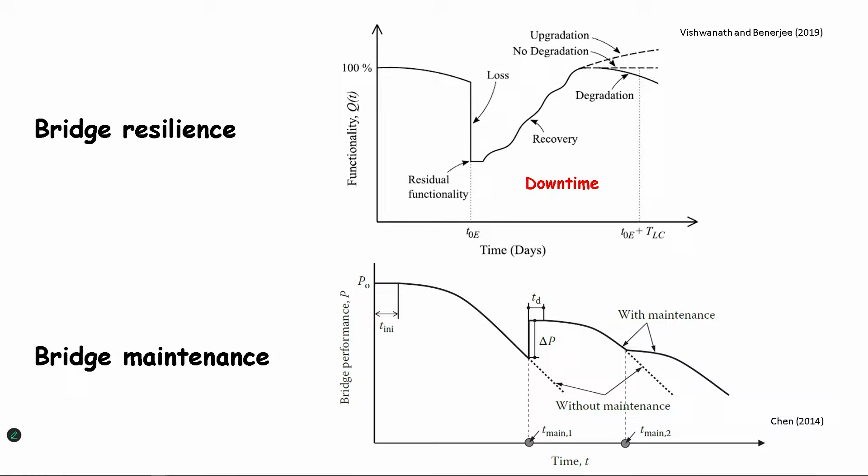At the bottom of the slide - we have to consider one difference between buildings and bridges: in bridges, it's very often the case that during the service life of the bridge we consider maintenance activity. So any resilience study related to this should consider this parameter.

I think in the future, particularly for places like Mexico - and I'm talking about many cities in Mexico, probably not the case of Mexico City, I'm not sure, maybe it's different - we have to improve communication among university, owners, governmental officials, and of course policy makers.

To enhance communication with communities in areas at risk of disasters, keep regulation codes up to date and enforce their use, and include social units in the seismic risk assessment. This is something I think is really important when we talk about community resilience.

We should expand research to assess the loss of functionality in urban areas after disasters, and promote research on transportation resilience, including social, economic, and technical aspects.

In the technical part, particularly for bridges, as mentioned in a previous presentation, I think we should increase the use of smart sensors in bridges to deliver real-time data. This is quite important, and in the last decades the cost of sensors has been dropping, so it's a possibility that is actually working in many countries, though not generally in Mexico.

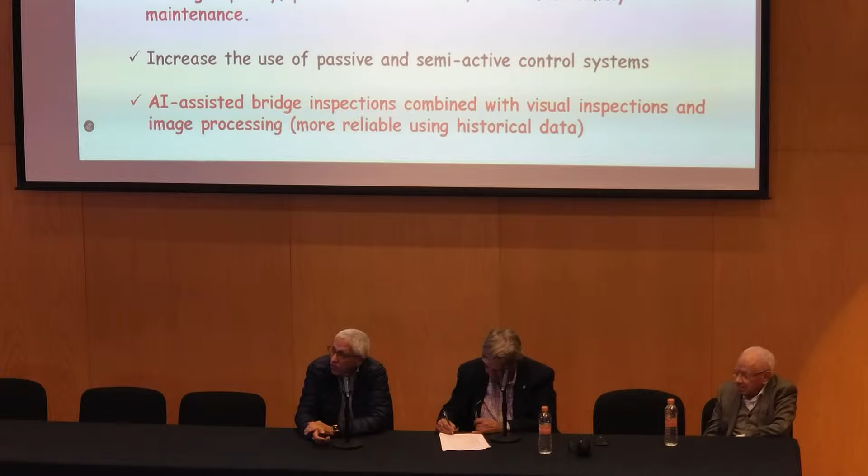And of course, the use of passive and semi-active control is fundamental to improve the behavior of bridges and buildings in the future.

We will link AI with visual inspection, particularly in bridges, because visual inspection is a very frequent activity for bridges. Combining these aspects of information, we could finally have more reliable information.

Regarding the activity mentioned by Professor Mario Ordaz, I think some work has been conducted to create automatic models, like building information modeling, which are virtual models. The most important part is that creating these virtual models makes it possible to run simulations, change anything in the model, and see the effect of that change on the possible behavior in the future.

So what is probably missing is the connection between building information models and interfaces with the software we traditionally use to evaluate structures. If we can integrate this model with a digital twin, it could give us much better information, and all of this could allow us to make a long-term performance evaluation.

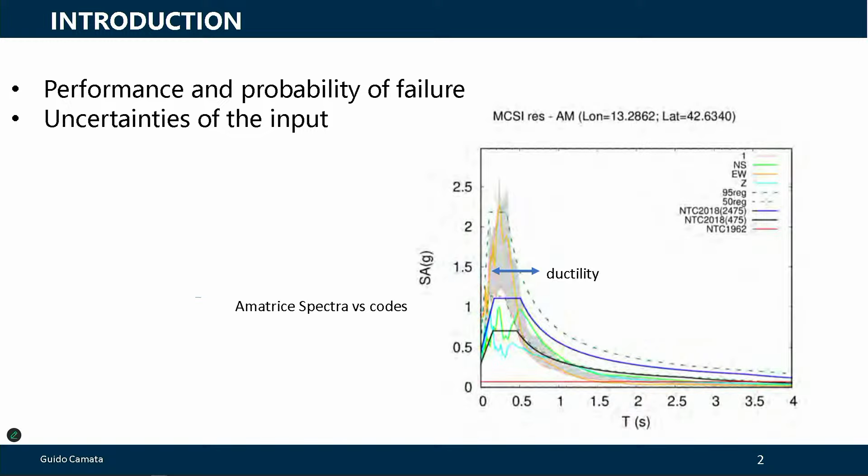And that brings up another aspect. If there is such a huge earthquake, it's very important to have ductile systems—to have plasticity, systems that can dissipate this energy. Otherwise, it's impossible to withstand this type of earthquake. So ductility is one of the most important things we need to consider.

But to consider ductility and the real behavior of these structures, we need to move forward. We can't base our design on simple elastic design with Q factors, reduction factors that are very simplified and cannot represent the ultimate limit state of the earthquakes. It's very important to develop new tools and be able to use them, because something we didn't consider today is that there are tools now available, but we don't have practitioners or even researchers often able to use them.

Very advanced topics—we will see numerical analysis, artificial intelligence, sensors, and digital twins, which is exactly my talk today, so I'm very happy everybody talked about it. Exactly what we do is develop advanced models and implement them in OpenSees, which is actually open source for free so everybody can use it. We also use OpenSees for digital twinning, so it's very important to know it's open source and easy to use.

We started talking today about different types of modeling for structures. Starting from very simple models like lumped plasticity—decoupled, or now more advanced models that can consider axial-flexural interaction or even axial-shear interaction in two ways. There are more advanced models like distributed plasticity, even with fiber sections, or even more complex 2D or 3D models, where we need to consider the biaxial or triaxial behavior of concrete, bond slip, and buckling of the rebars in a very advanced way.

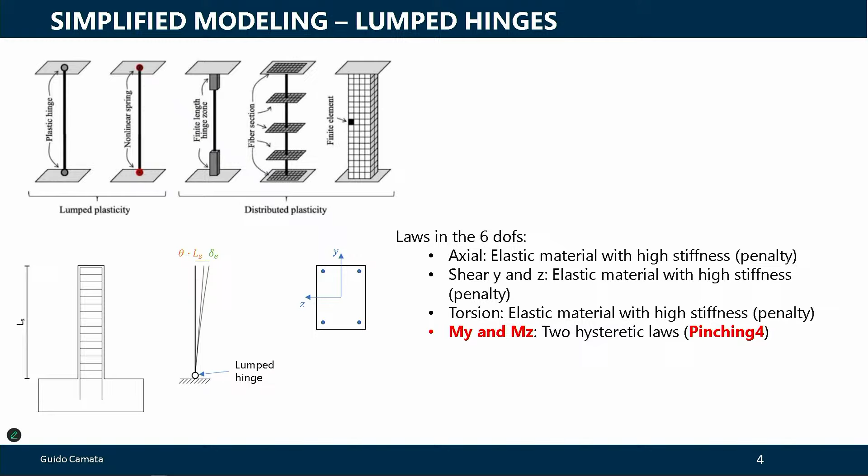Lumped plasticity is very simple, can model very large models, can even be used for regional approaches, but it has a lot of drawbacks—it cannot describe very well a lot of mechanisms, and it's very simplified.

Now we have the tools and the computer power to instead have a better description of the behavior of structures. It's very important to train people to use them, because we keep using old tools when modern tools are now available. But as I said, they need to be validated, and especially people need to be trained to use them.

That's very important because, as I said, it's the biggest uncertainty that we have. If you take one analyst and another analyst, they get two different results. That doesn't mean the tool doesn't work—it means people are not trained to use it.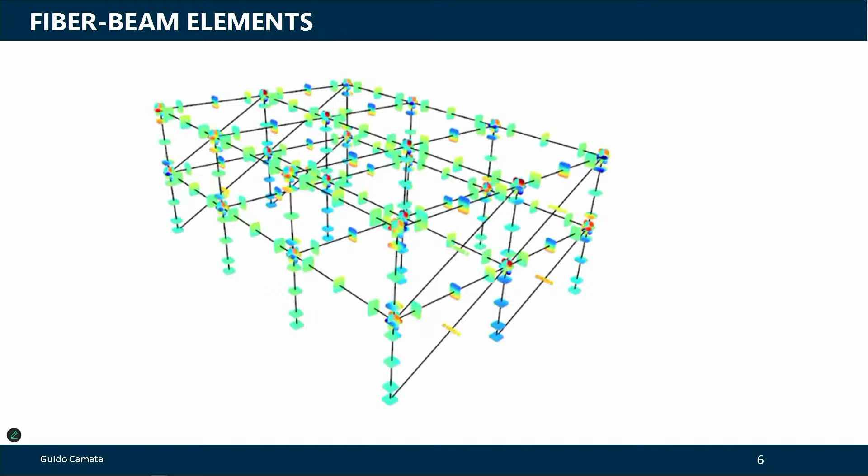Going back one second—this is actually a model from Professor Mosalam, but I don't know why the video isn't working. Anyway, it's a typical fiber element showing the description of a fiber section with distributed plasticity, and you can even model the infills, including removal of the infills when they go out of plane and fail. But these are not the models I'm most interested in.

Can we use these advanced tools to model large buildings? This is the new future—I think this is the future of earthquake engineering, also to be used by practitioners. What are the problems we have now? As I said, knowledge. A lot of engineers are skeptical about these tools, and I understand, because they are very complex to understand. That's the reason we need larger validation to use these tools.

But as you can see, we can model buildings considering the triaxial behavior of concrete—considering the confinement that is very important, especially in earthquake engineering—considering bond slip of the rebars, and considering buckling.

Everything is possible. If you look at the shear walls I showed in the video, the shear wall there is modeled—this is an experimental result, and it's modeled with each rebar modeled, considering, as I said, the buckling of the rebars, but you can even consider fracture of the concrete. So you can go into highly nonlinear behavior.

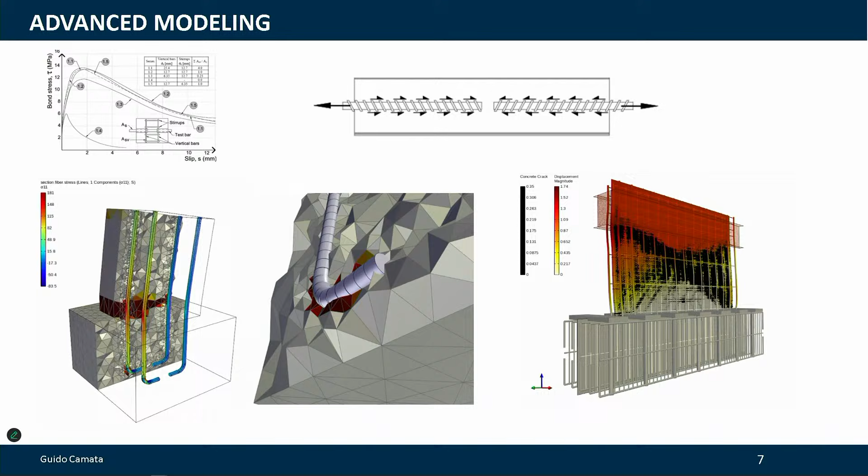How can we do that? Not anymore relying on implicit solutions. We normally mix explicit with implicit solutions—typically we go at the material level with explicit solution, and then correct the result with the implicit solution at the global level. This allows us to have 2 iterations typically, instead of 50 or 60. So a model like that in cyclic loading can run in 7 or 8 minutes instead of 2 or 3 hours. And this is the future, I think, of computation.

So it means models like that can also be effective. If you can see, at a certain point the model diverged from the experimental result because we weren't modeling the buckling of the rebars. So we know the limitation sometimes, but if we include the buckling, we can model beyond this level.

As you can see, you can model very sophisticated models, considering for example punching shear—that's one of the most complex analyses you can make in cyclic loading especially. And you can see that the numerical pattern compared to the experimental pattern can be modeled in large detail.

You can also use modeling approaches for this type of building. Think about it: you can model a certain part of the building with a very detailed model, and use more simplified models for the larger building. So you can consider the correct boundary conditions, but still capture the detailed behavior of the building.

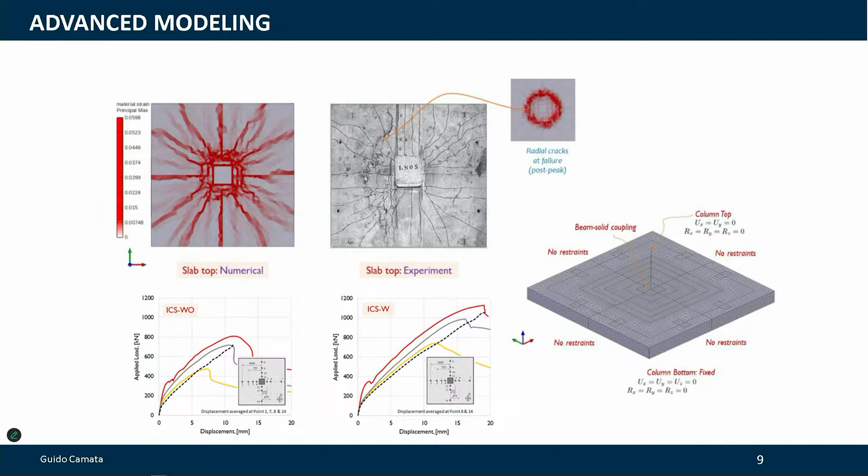The videos don't all work, but anyway it's not important. Now it's working—so you can see basically the failure and how it propagates. This is actually part of an entire building, but I'm showing only the detail.

On the left, just to give you an idea, is without shear links, and on the right is with shear links, and you can even see the different failure patterns. On the left it's less ductile, and on the right it's more ductile. So you can model even this type of failure.

This morning I was talking to a researcher who told me that part of his research is frame-infill interaction. For this too, we have a lot of simplified strut models that can't consider many issues—for example, the increased shear forces on the frames.

Now, with these improved models, you can model the infill using the singular brick, separated brick, and model it with interaction—for example, contact elements that also consider this in explicit solution, so they can also be very stable.

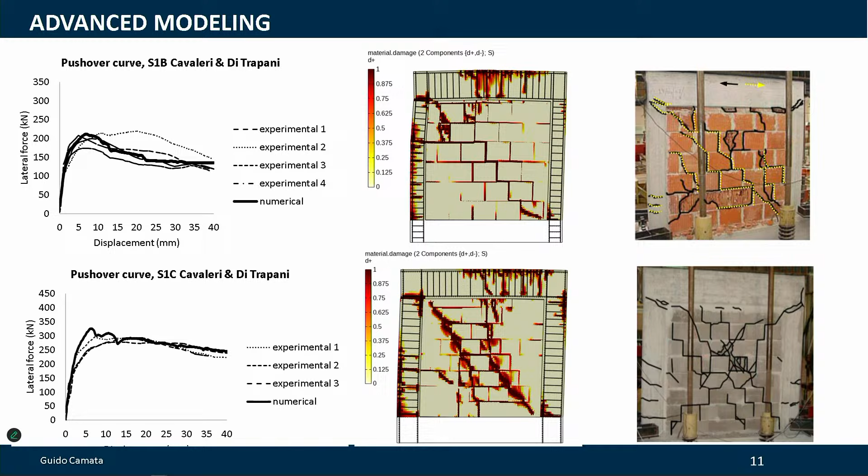For masonry walls, you can model them with homogeneous material, but even using orthotropy. In this case, we model the mortar and the brick separately, and you can model large buildings using these approaches. This is very important with the mortar, because typically we use homogeneous isotropic materials, but masonry is orthotropic, and it's very important to consider orthotropy to capture the failure modes.

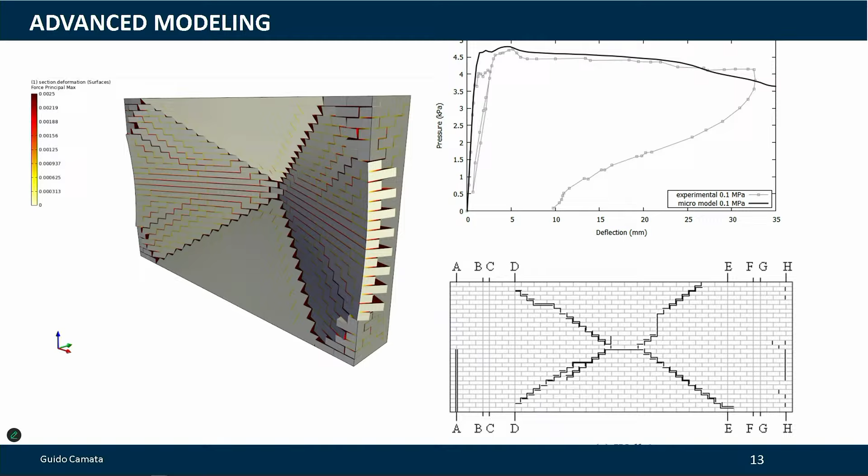Or out-of-plane failure like this one, which has a typical shear behavior—you can see it always fails in shear, not in flexure, because the shear deformation of the brick is actually very important. In this case too, we can model this type of structure.

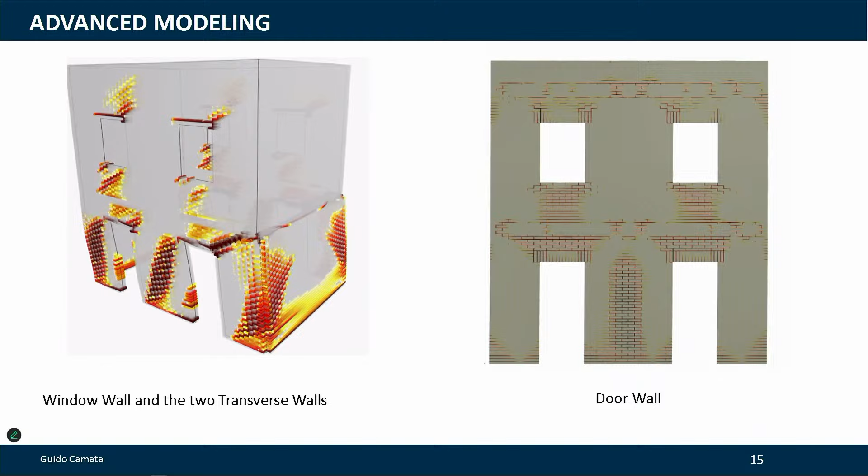But often they tell me, you can't model entire buildings like that. So this is an entire building modeled brick by brick, in cyclic behavior, using this type of approach. These are results comparing a test made in EUCENTRE, comparing experimental and numerical results.

So there is validation around. You just need to train, as I said, the people and to validate these models.

Another thing I wanted to show you is another model with masonry, to show the performance of this type of model, but I think the video isn't working. Can you push the video? Can you go on the slide? Oh, it's fine, don't worry, I'll just show the results directly. It was showing but now the slide isn't working anymore. Can you go back to the slide? I think you need to click on it. It's not working anyway, let's go to the next one.

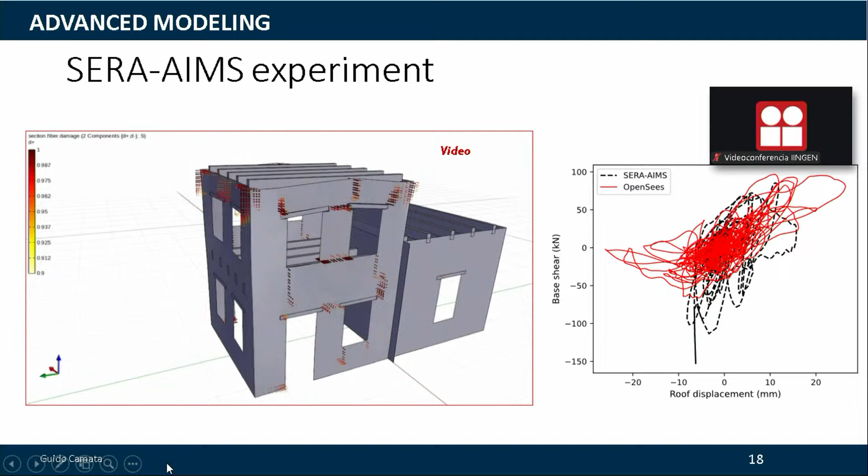So you can see the results now, the red and the black, comparison between experimental and numerical results. I couldn't show you from the video, but this was a problem of pounding, where two buildings were going into pounding. That's a very complex behavior to consider because it's high frequency. Typically in implicit solution you have no convergence because the frequency is too high, but you can see how stable the behavior is. So you can model easily also pounding for this type of structure, including high frequency components. As you can see, the results in terms of displacement and acceleration are good, so we can definitely go into this type of analysis.

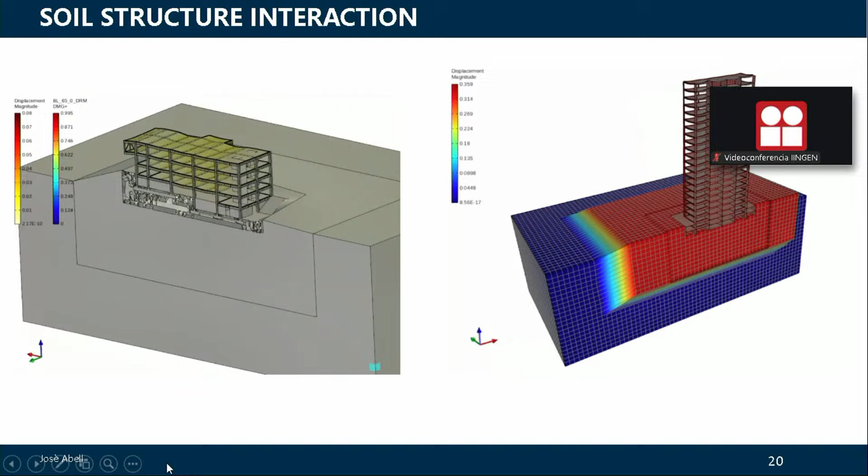Another thing that was mentioned today is soil structure interaction, especially starting from the faults. There are also some videos. This is actually a model made by a Chilean professor, Professor Abell, who implemented in OpenSees the domain reduction method. In this way you can model even starting from the faults directly to basically the soil interaction model. This instead is a model also of soil structure interaction. As you can see, we can model directly the entire mountain and see the amplification and reflection of the waves.

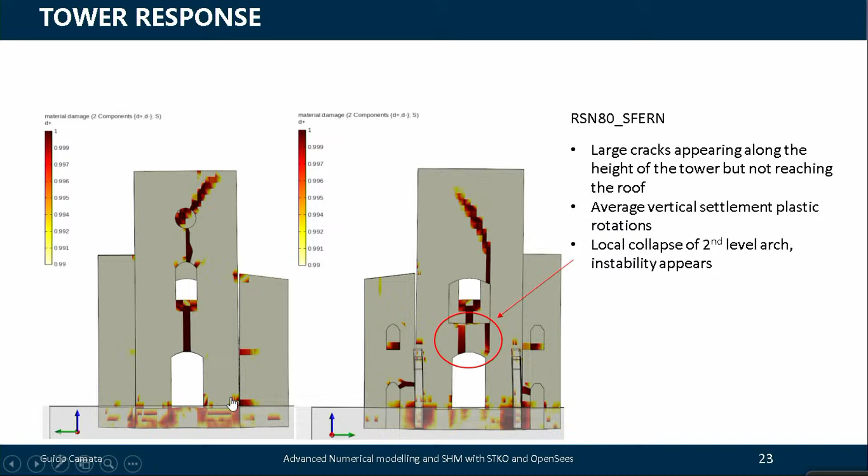Another topic that was discussed today is how we can improve these models and make them more real. These are called digital twins. Typically the best way to do it is to use sensors, placed on the structure. Several types of sensors could be used: accelerometers, inclinometers, gyroscopes, crack meters, potentiometers. So you can measure a lot of different things, read them, and project them into the digital twin.

I'll show you now what I mean with an example. The most difficult thing with this type of model is that typically you have a large amount of data, terabytes of data, especially if you read continuously. So you need to use artificial intelligence to select the data that are meaningful for your analysis. As mentioned before, the future is going to be mixing artificial intelligence with this type of advanced model, so artificial intelligence can read the data, interpret it, and basically give you insight.

Just to give you an example: think about your heart rate. I measure your heart rate every day. It changes every day, goes from high to low, the average, peak, maximum, minimum changes continuously. So it's impossible to tell if you are sick just by reading one data point or one day. So we read your signals for 3-4 months, using 300-400 features of your signals. We use artificial intelligence to classify these signals, and then we can tell you if you're sick, if something is changing in your heart rate, because there is a different trend or a different feature changing. We do the same for bridges. We measure a lot of features, and after one year we can tell you if the performance of the bridge is changing.

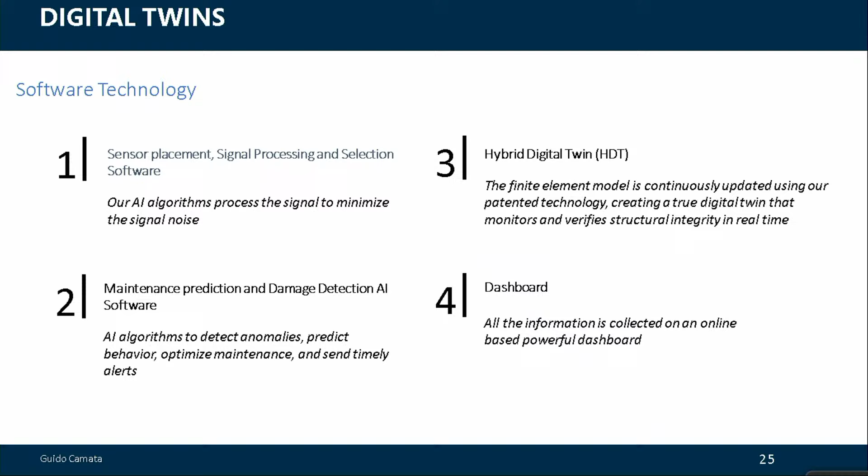You were mentioning that with sensors, you can model beyond the performance, beyond the serviceability limit state. We can measure only the normal performance of the bridge, not the ultimate. But to study the ultimate, the digital twin and sensors are very useful, and I'm going to show you why with an example.

These are two very important bridges in Italy that we are monitoring, using artificial intelligence and digital twin technology. We use Bayesian updating to update the digital model in real time with the sensors.

If you look at the first video on the left, this is a digital twin. On the left there's a numerical model, and on the right are the signals we are reading from the sensors. We read the sensors, perform operational modal analysis, get the frequency eigenmodes of the bridge, and use Bayesian updating to update the numerical model in real time, so the digital twin becomes an exact replica of our bridge.

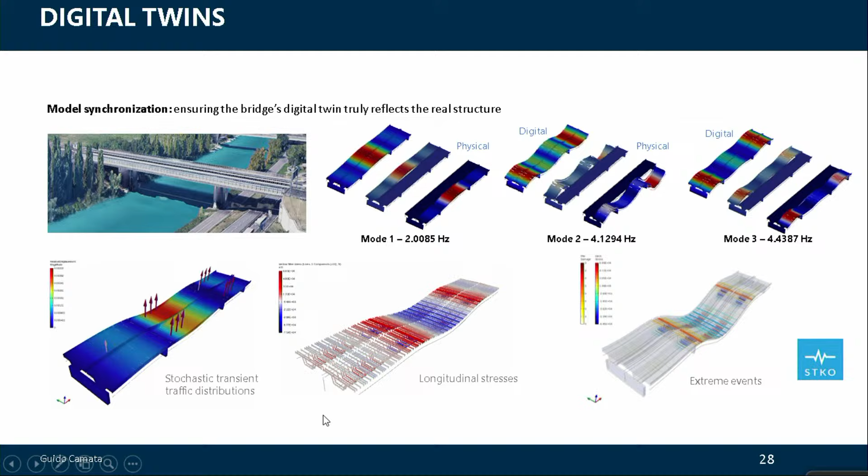What do we do with this for the performance of the bridge? We run stochastic analysis on the bridge and can tell you what happens in the next 50 years. Or we run extreme events to see the performance beyond the serviceability limit state. This is an example of a railway bridge.

Here you see the wind being read, and now the train going by. This is the wind reading on the sensors, and you'll see the bridge as well. Why is this important? Think about it - if we have it synchronized, it means we can perform analysis with this model to see, for example, fatigue problems with the bridge.

Or we can run earthquakes and simulate the earthquake to see the probable damage on the bridge. And then we can also train the artificial intelligence with this model to study the bridge at the ultimate state, for extreme events.

So these are the stochastic analyses, and this is what we typically do. We have the bridge, run several time history analyses, see the behavior of the bridge, classify the damage, and then use artificial intelligence to train the model we need to use for the structure.

We also use this after extreme events, once calibrated, to see the performance. You have the signal at the base and sensors on top of the bridge, so just after the event you can see the bridge's performance. All these models are non-linear, so we can model what is beyond the service limit state.

So to close my talk - we have these tools, and I think we are more advanced than we think. Sometimes we have a lot of data, we have finite element models that are extremely performing, and we now have algorithms for artificial intelligence that are really effective.

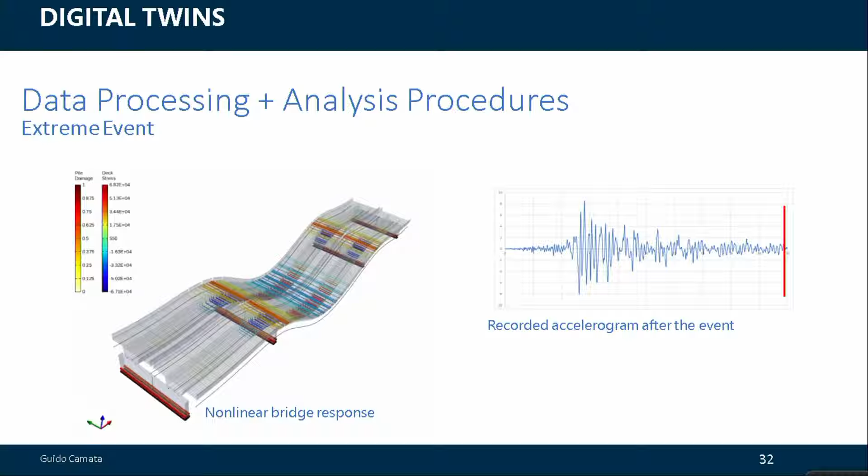I think we got almost to the end of this. What I would very much like to invite all of you, please, is to come here or from there, and I will ask you three things. I apologize - the objective of these things was very biased toward what we would very much like to hear, and I detected three things for which I didn't get enough information, and I would consider it very important.

So it would be, for me, a good opportunity to ask you three things. The first one is, what should we do to educate our future engineers so that the aims expressed in this panel are fulfilled? The second one, what should we do about risk communication?

Risk communication is the most important thing, I consider, as we should not forget that disasters are not natural, they are man-made. Many of the unexpected things after a big earthquake are a consequence of not knowing the risk. We were not prepared for that. And when we say 'we,' I mean society, communities.